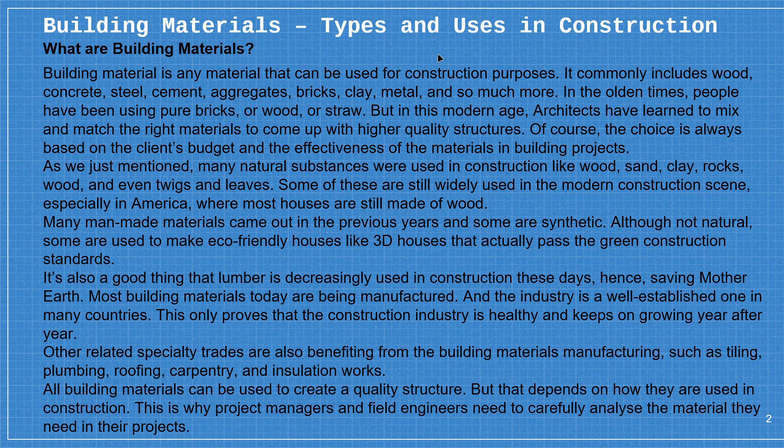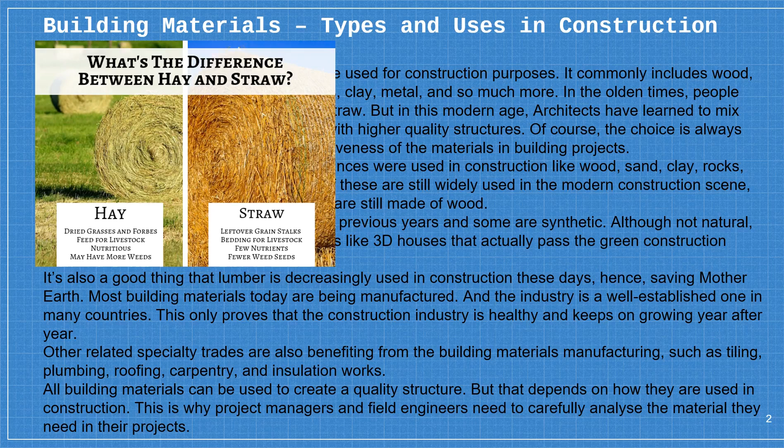Here is the difference between hay and straw. Hay is the dried grass that forms feed for livestock, what we feed to cows and dairy animals, and it's nutritious with more weeds. Straw, on the other hand, is used for roofing, usually seen on bahay kubo. Straw is leftover grain stalks, the part with no grain left, the last portion of the plant. It's used as bedding for livestock, what they lie on. Straw has fewer nutrients and fewer seeds. That's the difference between hay and straw.

So what is the importance of selecting the right building materials? It's very simple, it has a big impact on the quality of the structure. If you open your eyes and look around,

you'll notice contractors are using the least possible or cheapest building materials. But in the future, you should choose materials that are right and standard, so your building becomes standard, not substandard. No matter how proficient the construction team is, when materials are cheap and substandard, the building will still face many problems and won't last long.

Especially here in the Philippines, where we get hit by strong typhoons and earthquakes. So think about it, if you use substandard materials, how many years will it last? If you're only thinking about profit, the profit of the general contractor, the developer, etc., choosing the right material is very crucial in the projects of architects.

The other types of construction materials - there are so many building materials in construction. We're going to look at each material and its uses in building projects. First we have natural materials, which from the name itself are made from natural sources.

This material can be categorized into two sources: natural and synthetic. Natural construction materials refer to those that are minimally processed, like lumber or glass, meaning they undergo only physical alteration while still being under nature. On the other hand, synthetic construction materials are manufactured through a lot of human manipulation, examples being plastics and petroleum-based paints.

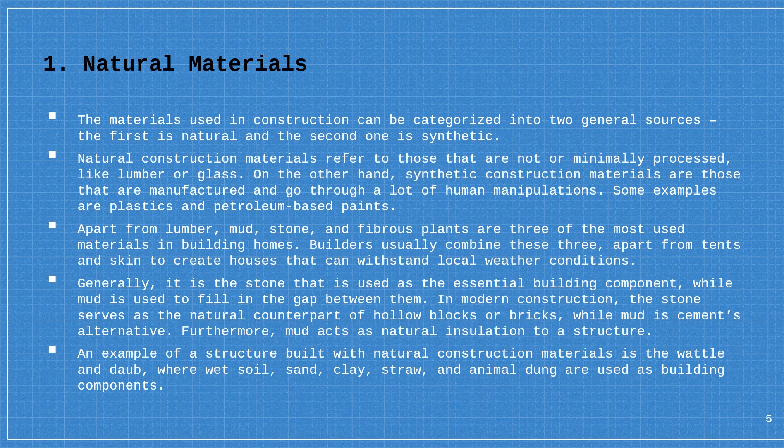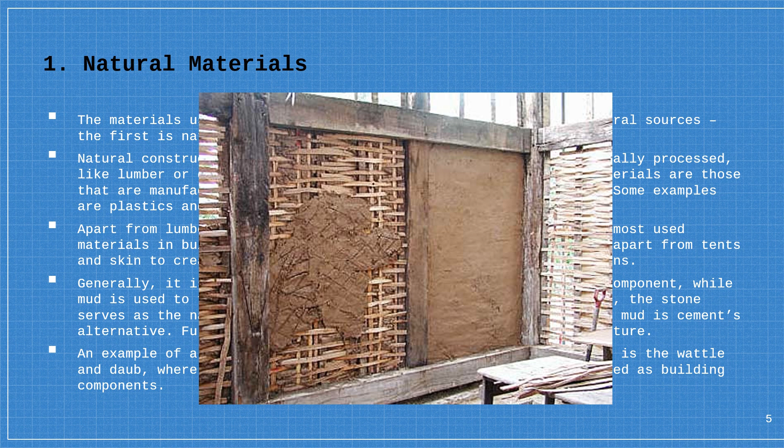Apart from lumber, mud, stones, and fibrous plants, there are three most used materials in building homes. Builders usually combine these three, apart from tents and skin, to create houses that can withstand local weather. That's what mud looks like. Another alternative material for insulation is wattle and daub - soil, sand, clay, straw, and animal dung are used as building components. That's the example, wattle and daub, and that's also used as wall insulation, serving as a natural barrier from extreme weather outside the structure.

Number 2, we have fabrics. Fabrics have been very popular even in old times because they were used in the homes of nomads, even our ancestors like the Aetas used fabrics. Where do these fabrics come from? They come from animal hide, the skin of the prey they hunted, then they stitch it up and make it into fabric.

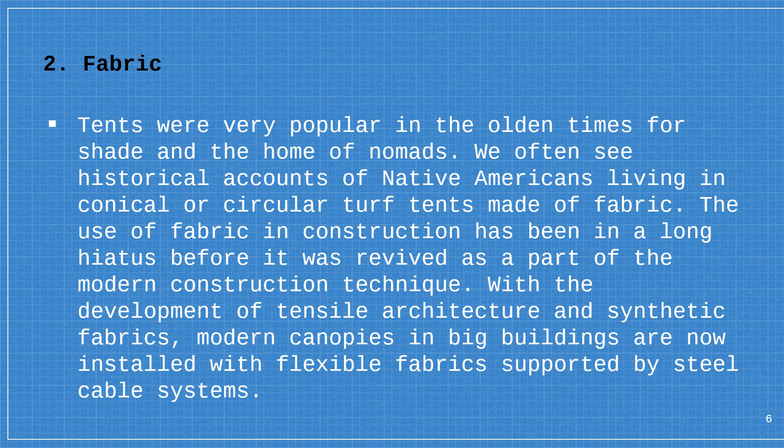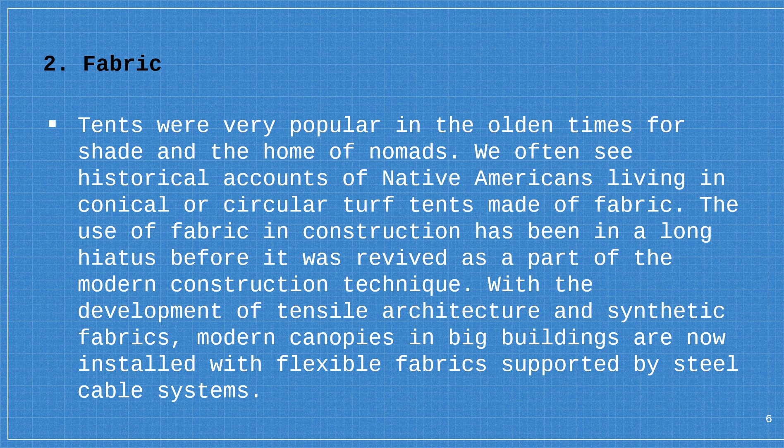They clean it, dry it in the sun until it stretches, stretching it very thin, then make it into one big fabric so they can have their nets, or rather tents, for them to be under those fabrics. An example is the Indian teepee, made up of animal hide fabric used as tents. That's where tensile architecture used today originated. Have you seen the one in front of the Philippine Arena?

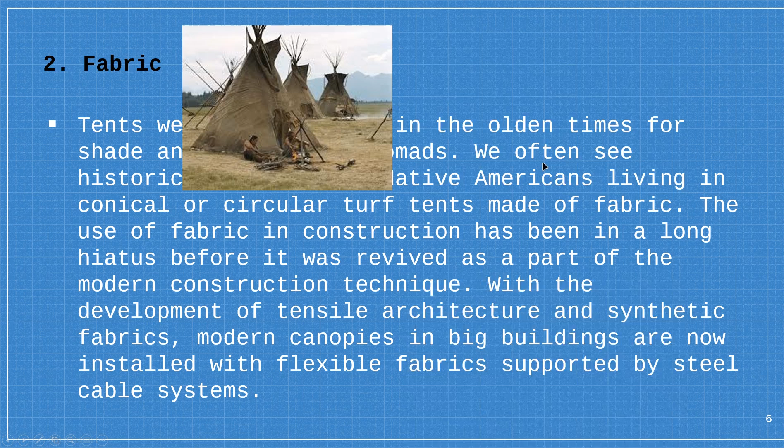Yung tent sa front, parang naka-tensile structure - so that's the one na pinanggalingan ng mga tensile architecture. Dito nanggaling. This is the modern version of it, ganyan yung kanyang itsura.

Next is mud and clay. These are natural construction materials still used until today, and the amount of clay in construction creates different styles of buildings. If you want flexibility in your design, mud and clay should be used also. The deciding factor of the amount of each material lies in the quality of soil used.

Larger amounts of clay can build adobe style houses. On the other hand, lower amounts of clay can be used as sod in building the foundation. Apart from soil, the amount of sand, gravel, straw or grass can influence the clay structure you create. Rammed earth is compressed earth, creating walls by compacting clay between planks by hand - iniipit between two planks para maging parang palaman ng inyong walls. In this modern age, mechanical pneumatic compressor is used in processing clay to create more intact rammed earth. Kasi yung bricks naman is made of soil and clay.

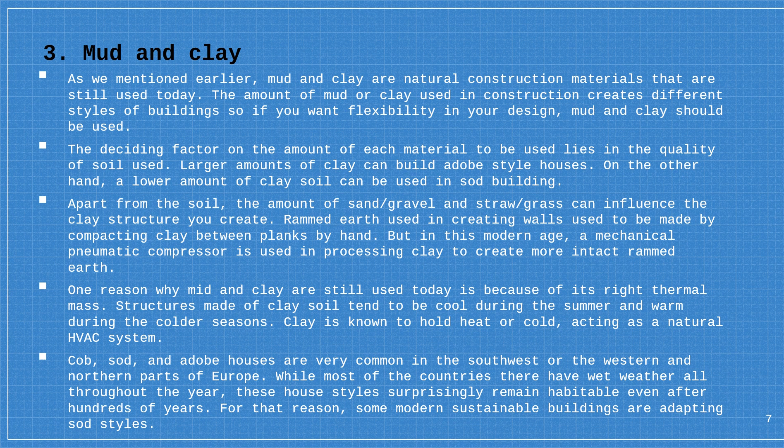One reason why mud and clay are still used today is because of its right thermal mass. The structure made of clay soil tends to be cool during summer - pag arid countries, yung mga hot countries, it acts like a natural HVAC system, which is heat, ventilation, and air conditioning. Cob, sod, and adobe houses are very common in the southwest and western north part of Europe, while most of those countries have wet weather all throughout the year. So these house styles surprisingly remain habitable even after hundreds of years.

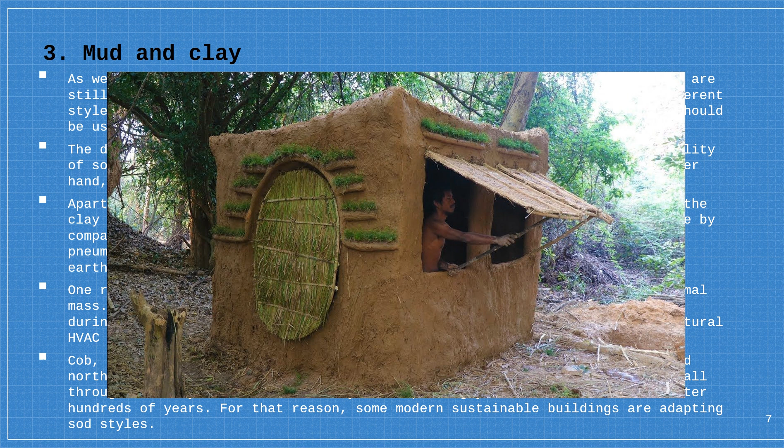So this is the example of the mud and clay construction. Probably nakita niyo to sa internet, marami yung gumagawa nito, ginawa pang vlog ng iba.

Okay, next we have rocks. Rocks became one of the first materials used by our ancient people, dated back to ancient times. In fact, the entire Egyptian civilization, specifically the pyramids, was made of rock, and it's one of the longest lasting materials available. Even if you won't see cave style rock houses these days, rocks are still used as components in other construction materials. It's already readily available, making it a less expensive material to procure.

But there are many types of rocks, and each of them differs in properties. So before using rocks in your buildings, you have to make sure you're getting good quality rock. Qualities of a good rock for use as material is that it should be dense in nature, making it a good protective material. Weight and energy density is considered a big drawback since it can be difficult to keep stone warm - kasi if you're using stones, usually malamig yung loob ng bahay mo. So pwede siyang gamitin sa mga hot countries.

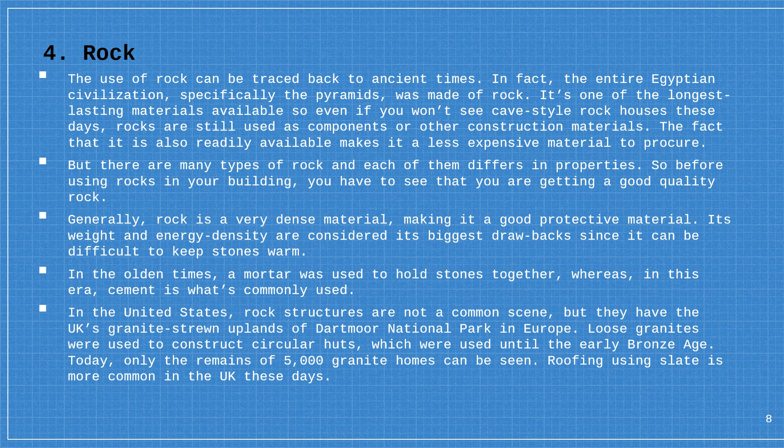In olden times, mortar was also used to hold stones together, whereas in this era, cement is what's commonly used. In the United States, rock structures are not common, but they have the UK's granite-strewn uplands of Dartmoor National Park in Europe. An example of that is the construction of houses carved out of rock - natural rock, and then you adapt your own style coming out from that rock boulder.

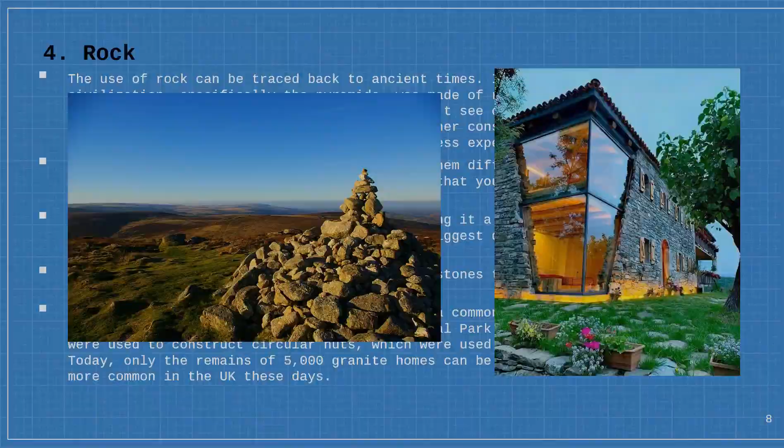Next we have thatch. The thatch or grass is another ancient building material that's already available and easily harvested. It doesn't need special collecting or transport instruments, and the advantage is it has good insulation capability. Pwede siya dun sa roofing natin, pwede din siya dun sa walls, ipitin na lang natin ng mga indigenous materials like sticks and bamboos, so it could be a good insulation in your homes.

African tribes have been living in homes entirely made of grasses, while in Europe or Asian countries, thatch roofs were prevalent until industrialization brought better roofing materials - yan yung mga GI roofing na natin, yung corrugated GI roofings. So back then, sa ating mga ninuno, as you can see, we were using thatch or grass roofing in our bahay kubo. Tama? So they are still not used in architectural projects in the Philippines.

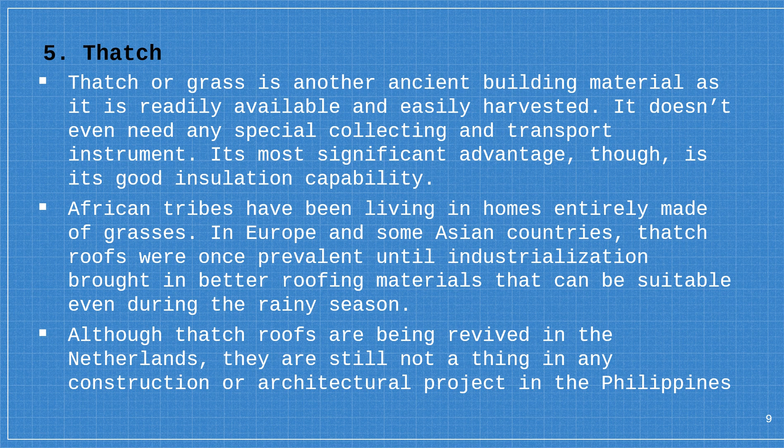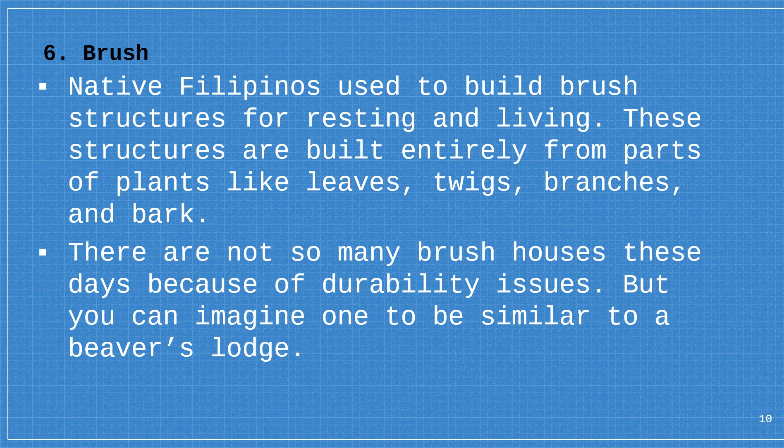Brush. So this brush is also used by native Filipinos for their structures of resting and living. They are built entirely from plants like leaves, twigs, branches, and also barks. There are not so many brush houses these days because of durability issues, but you can imagine it to be similar to the beaver's lodge. Yan, yung beaver's lodge.

Next is ice. So it's very uncommon here in the Philippines, but you may have heard about ice hotels in northern regions, and few tourists are able to go there to be fascinated by it. So in the past, ice was used in making igloos, and there are no other agents for keeping them together but the ice itself and the crushed ice also.

Next is wood. We have wood or lumber, widely used today, especially in the United States, because they use it as a cabin. So both are products of big trees where the trunk is usually broken into portions. Yan yung tinatawag nating board foot, yung kanyang measurement of units. Back in the days, wood is used unprocessed as logs and tied to notch in place. Logs siya, and then you just have to tie it, and it will be in place na.

But since architecture and new construction techniques came to play, wood has been cut and pressed into timbers, timber woods or planks, used for floors, ceilings, and cabinetry. So as you can see, hindi yan nawawala sa construction ng ating mga bahay. Wood remains to be a generic material used in making buildings in about any climate. It's flexible, can be bent while keeping its strength. So even though it has strength, meron din naman siyang kalaban, which is the termites.

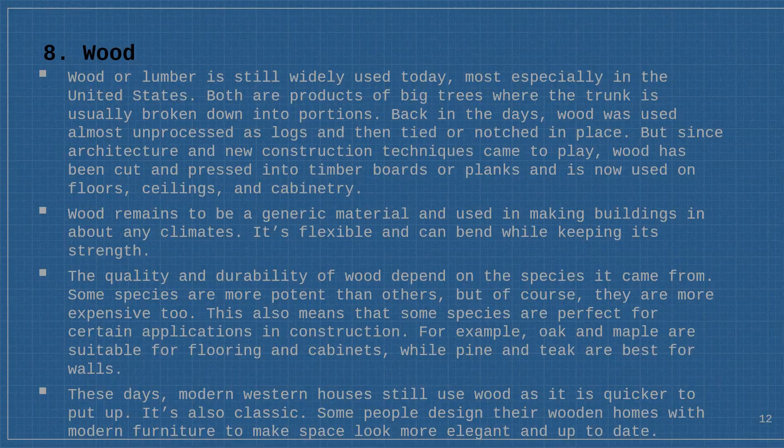Next we have brick and block. So bricks are made from kiln-fired materials. These are clays or shale used to make bricks, and some others use mud when the funds are insufficient, but of course the quality isn't that good. So clay, yung pinaka version natin here in the Philippines is yung concrete hollow blocks, or yung CHB. So brick and block is made from clay, clay bricks,

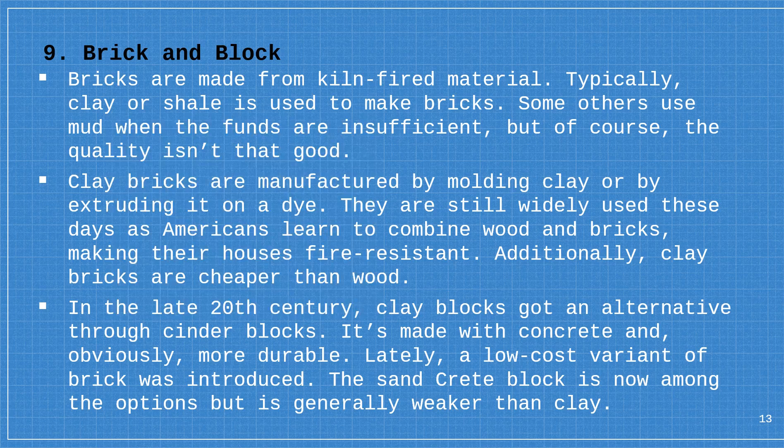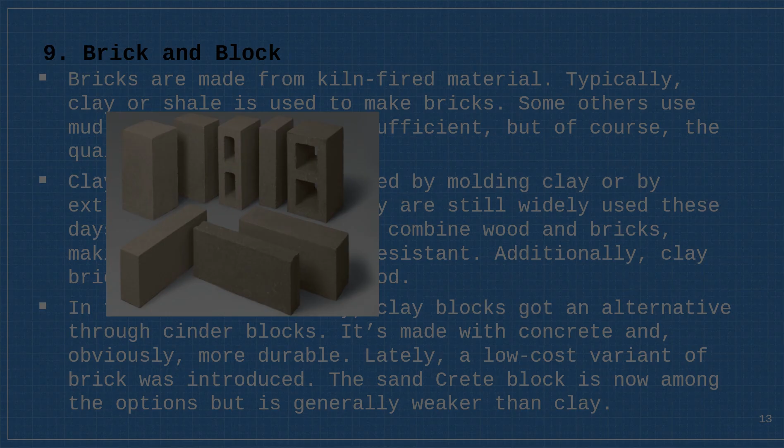Next we have the concrete. Most commercial and industrial structures are now made of concrete. It's trendy because of its strength, longevity, a composite material produced from aggregate and cement. Portland is the most widely used concrete these days, and it uses mineral aggregates like sand and gravel, Portland cement, and water for its mixture. However, concrete has a low tensile strength. Kumbaga, mahina siya pag yung pahila na forces, 'di ba?

Sa isang building, yung mga columns natin and beams, there are forces acting on them. May compression, meron ding tension. So pag pure concrete yung ginamit natin at walang steel, kasi si concrete mahina yan pag you pull it, or the tension force will be applied to a concrete, so it will crumble. So kaya siya natin nilalagyan ng steel, because steel is highly durable in tension.

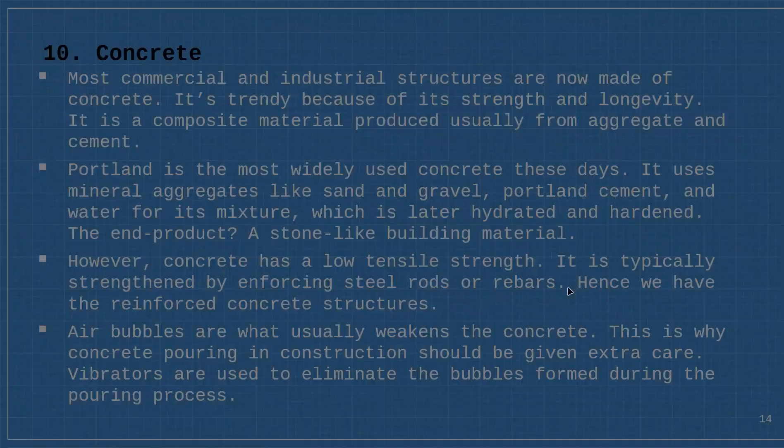Next we have metals. So very obviously we are using metal as one of the essential materials in making modern buildings like skyscrapers. Without metal, it would be very difficult for us to put up or to build a skyscraper if we don't utilize metal.

Steel, whose major component is iron, and the most common metal used for construction because of its longevity, strength, and flexibility. However, the one weakness of iron is corrosion. When there's a reaction with the moisture in the air, it creates a reaction, the name of which is corrosion, and it produces rust. So in order to eliminate corrosion, aluminum alloy is sometimes used as an alternative, but it is more costly than steel.

But when you need your building put up near the shore, or near the sea, it will be more advantageous because it is highly resistant to corrosion. Other metals used as building materials include brass, titanium, silver, chrome, and gold. Titanium and brass can be used in construction, while the more special metals are used in decorative details. So that is under metal.

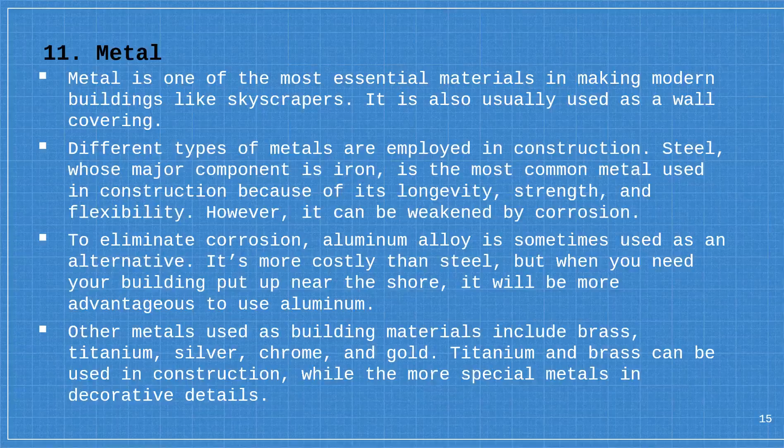Glass. Glass has a wide range of applications, especially in curtain walls, the large glass walls of commercial buildings, and it can be cheaper to put up than concrete for walling because it's quick to finish, but it can never beat concrete on durability, obviously. Of course, these modern glasses are processed for thickness and strength and are easier to maintain. The aesthetics are also much better compared to concrete.

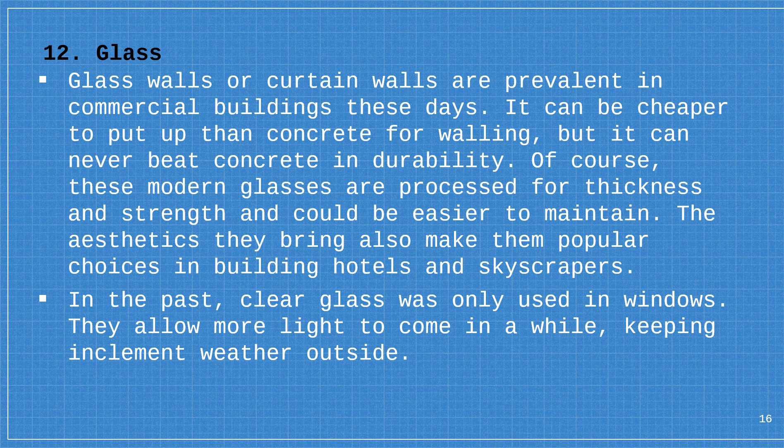In the past, clear glass was only used in windows, allowing more light to come in while keeping inclement weather outside, because it also blocks the temperature from the outside.

Next, we have ceramics. These were common materials in this era, because ceramics are used in floors, fixtures, countertops, walls, ceilings, and also building materials. Ceramics come from clay pottery fired in kilns, and in this generation, though ceramics are used more in construction applications, they are made through more technical processes to improve their strength, because they are very brittle. And now, we use ceramics mostly for decorations like vases, plates, and furniture.

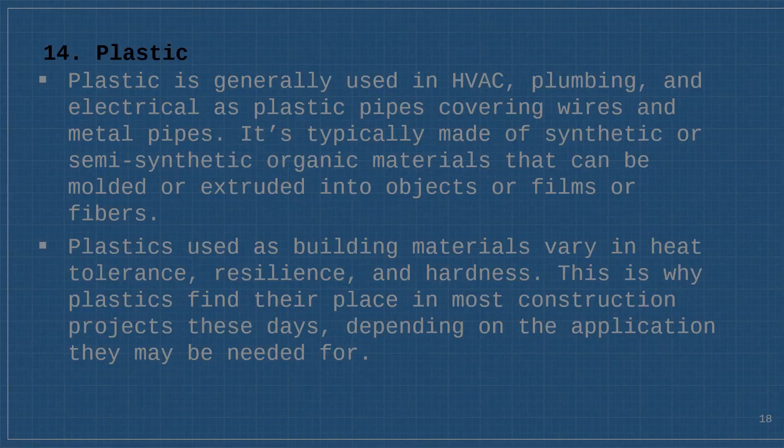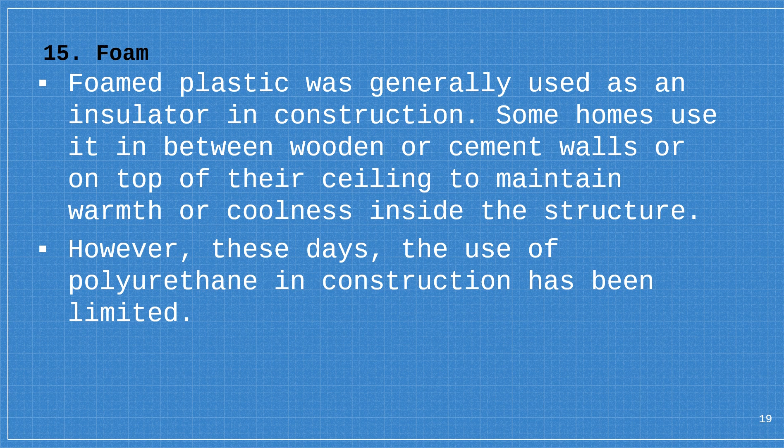However, the use of polyurethane, one of the materials in foam applications, has been limited by the World Health Organization because of the threat of its chemical reaction in the human body. It's dangerous, especially for those using the structure and especially for the installer.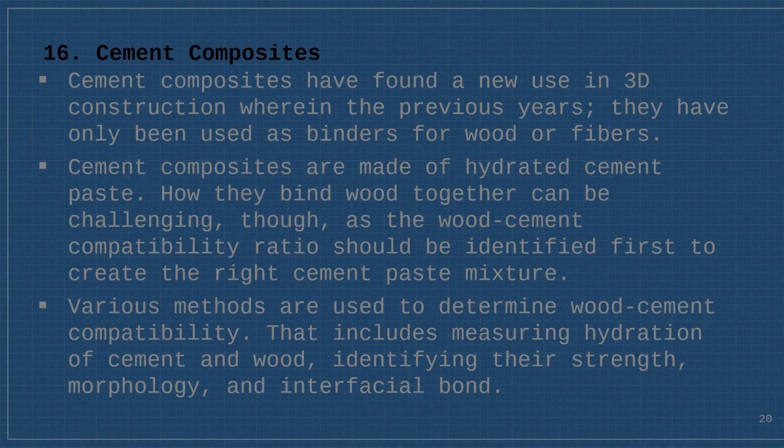Then lastly, we have modern building materials. The construction industry in modern times has grown into a multi-billion-dollar industry, with employment and growth rate of the building industry projected until 2026, so more construction will happen in that time. Following this trend, the construction industry and building materials are harvesting their potential and evolving their techniques to be used in modern times.